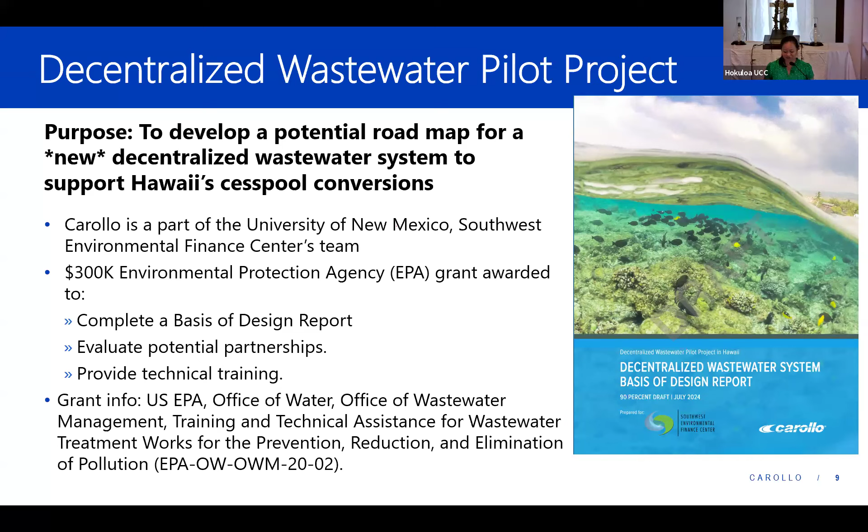There will also be recommendations for decentralized systems, such as we'll talk about today for Puako, but there'll also be recommendations for areas that need to be converted by individual wastewater systems, so at a household level. And then you've also heard and seen the South Kohala Community Development Plan that included Puako. So there are other community development plans for other regions within the county.

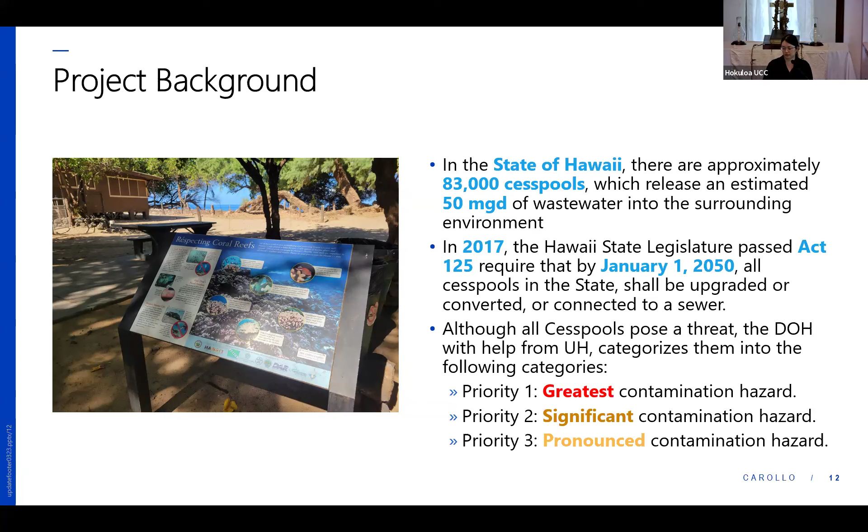The good news is there are many options to replace cesspools. Generally, there are 3. The first one I'll talk about is connecting to a centralized treatment plant. So these are your large treatment facilities that receive wastewater from towns or cities. The example shown here, the red lines, those are the sewer system in Kona served by the Kealakehe treatment plant.

A second option that might make more sense if you're looking at maybe a neighborhood or a group of homes or a commercial area like a school, hospital, or shopping mall, those could connect instead to a decentralized or cluster system or a package plant. So these are like a smaller version of your centralized plant.

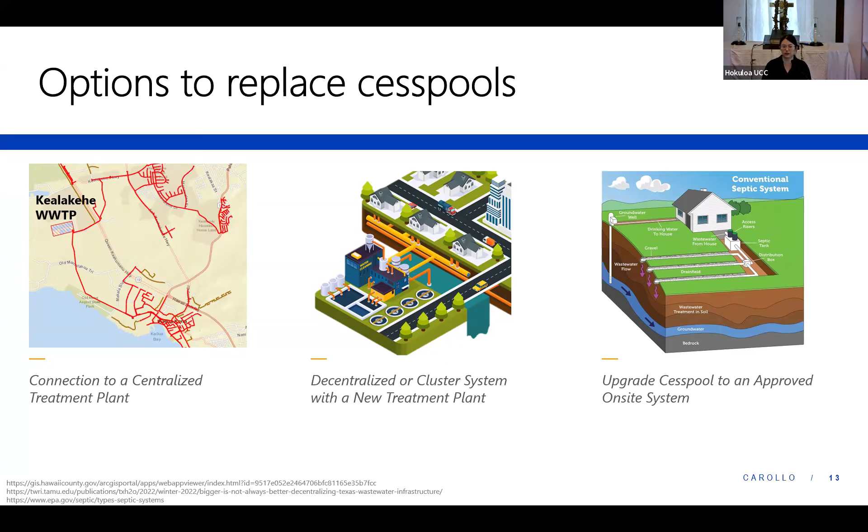Now, if you look at more rural areas, or if they're really far from a place with sewers, or it's just not really possible to put sewers in there, maybe due to the geography or topography, then your home might instead have an individual wastewater system. So these are your septic tanks, your aerobic treatment units, and leach fields.

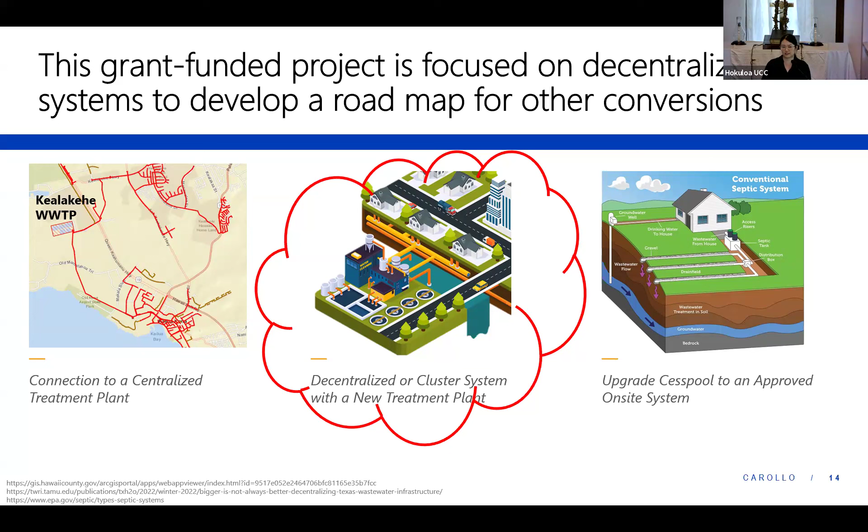For our grant-funded project, we focused on decentralized systems, and the goal is to provide a roadmap for other communities that have cesspools and are interested in connecting to a decentralized or package plant. We looked at different candidate sites, focusing on the Big Island, since the Big Island has the most cesspools compared to the other islands in Hawaii.

And great news for everyone, we selected Puako for this study, and it was for a number of reasons. All the cesspools in Puako are priority 1. And in Puako, you have the fuel break, which provides a great opportunity for water reuse using recycled water. And there have been studies done documenting the environmental impacts on the coral reefs.

And as we heard from Puako for Reefs, this community has been great in support for moving forward with a collaborative solution to improve the reefs. And there have also been many previous studies commissioned looking at different conversion efforts and ways to improve the coral reefs. So the next couple of slides are just going to zero in on a couple of these reasons.

First being the evidence of wastewater negative impacts on Puako's reefs. So studies have shown that the coral cover was reduced by 50% between 1970 and 2010. And in samples collected from the shore, Enterococcus indicated sewage pollution from the cesspools and the other wastewater units.

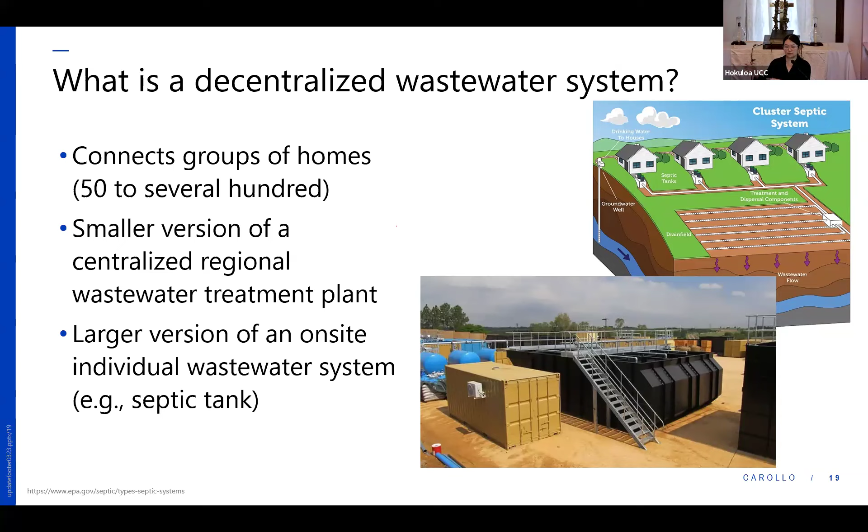So you see here in the graphics, these are just different ways you can organize these decentralized systems. They could be just small groups of homes with a shared leach field in this case. And then the bottom picture, that's an example of what a package unit might look like. They're modular, so you can sort of build them up to increase capacity of your plant.

Whether you have a centralized, decentralized system, or just your on-site system in your backyard, as George mentioned, all three of these will have three components: collection, treatment, and effluent management. So wastewater collection, that's just getting raw wastewater from your home or your business into a network of sewer pipes. And then the sewer pipes will bring that wastewater to a treatment facility.

That's where you have your primary treatment, biological treatment that cleans the water. In this example, that treated effluent goes into an outfall. But as we know, there have been better ideas now, more innovative ideas of reusing the water so that you can conserve your water supply.

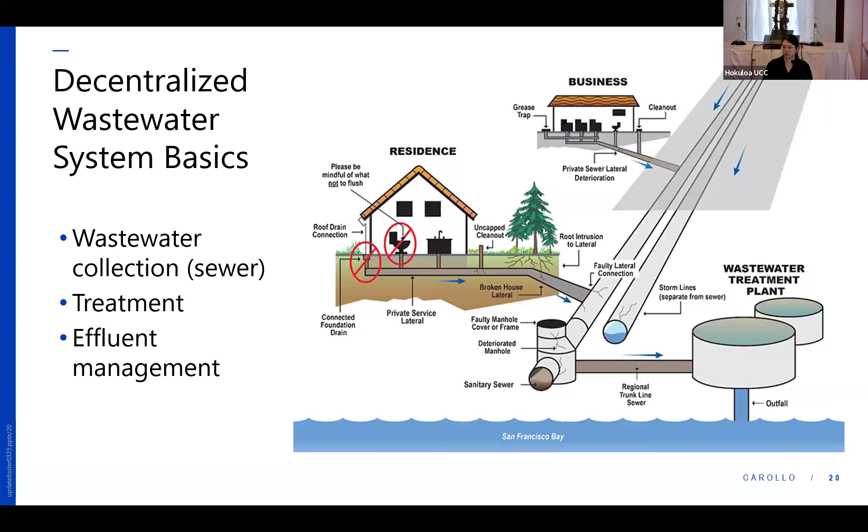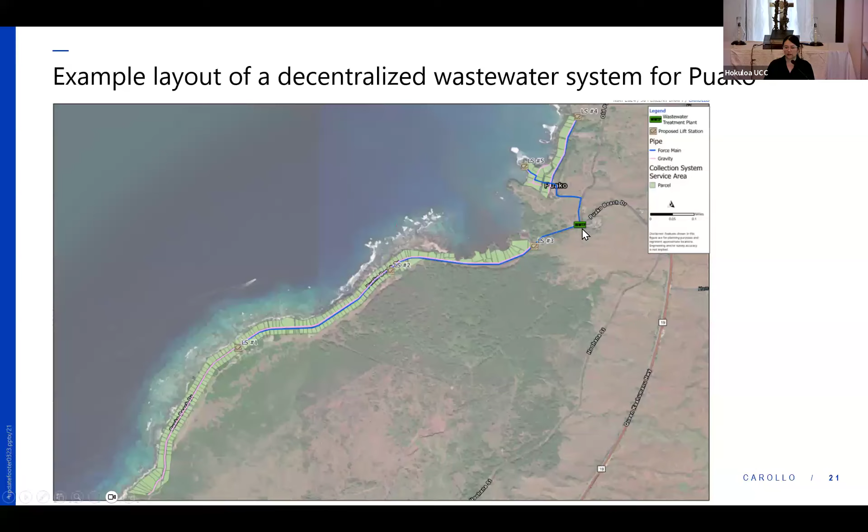Now, before going into all three, this is sort of an overview example layout of what we drew up for Puako. The green boxes, those are your TMKs or parcels. And then there's a blue or pink line running along the shore here in Puako and Wailea Bay. Those are your gravity mains or your force mains. And those will carry wastewater to the treatment plant that we just have a preliminary siting at the transfer station.

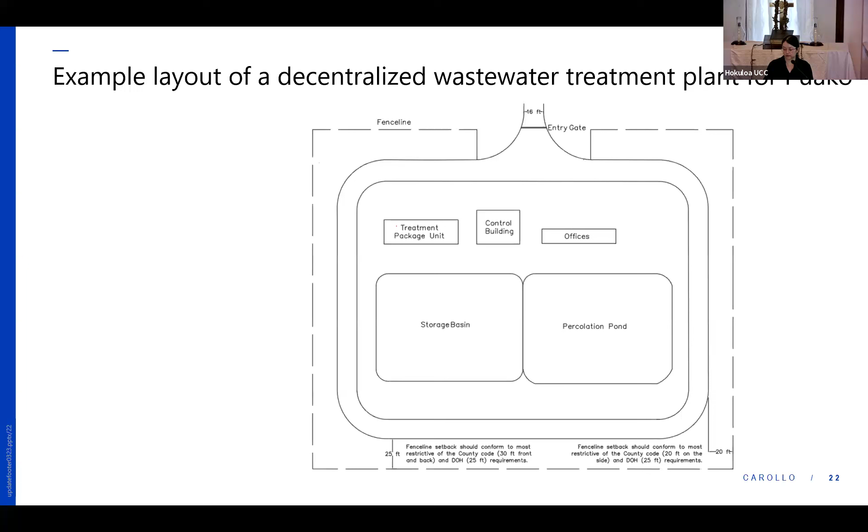The treated effluent in our report talks about it going into a storage basin. And from there, it would be discharged to the fuel break to be irrigated. And according to the Hawaii Administrative Rules, you need a 100% backup disposal system. So for this, we assumed a percolation pond.

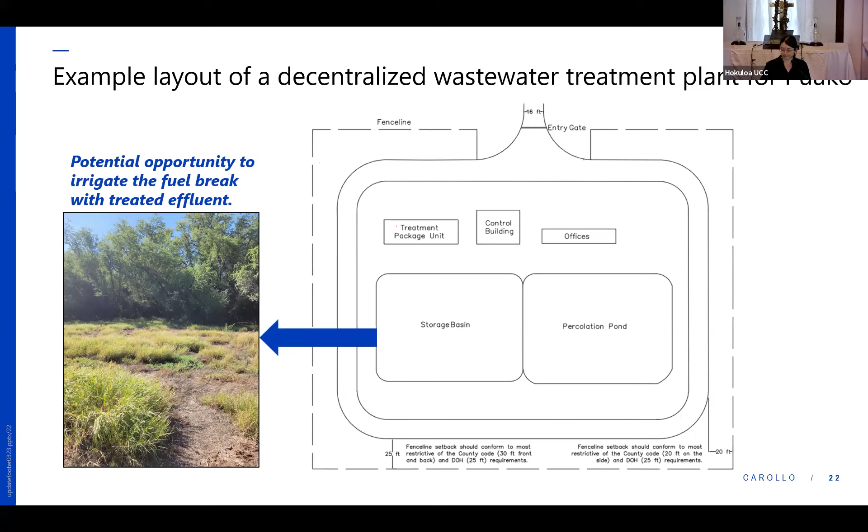Okay, now we'll dive more into each of those three components. So starting with the collection system, we assumed gravity sewers and pump stations. Gravity sewers, these are your most traditional, conventional methods used across the state. Operators, contractors, they're the most familiar with this type of system. And as the name indicates, they're basically just sloped pipes, carrying flow by gravity.

So ideally, maybe the road would be sloping towards the treatment plant, so the gravity sewer can pretty much follow the terrain of the land. But if you're in an area where it's more hilly, or in the case of Puako, where it's flatter, the gravity sewer is still going to slope down, but at a certain point, it's going to get too deep.

And that's where the pump station comes in, where it basically pumps or lifts up the water to a higher elevation. And then the process starts again with the gravity sewer, again sloping down. And this continues as you get to the treatment plant.

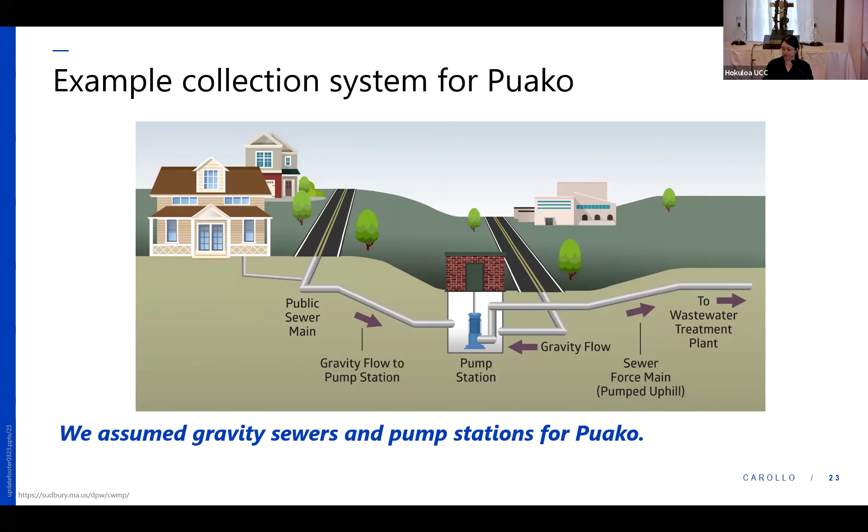For the treatment system, we assumed membrane bioreactors, or MBRs. In the industry, these are accepted as producing some of the highest quality effluent, because we want R1 water here. So Department of Health, they have their different categories of recycled water: R1, R2, and R3. R1 is the highest, and you couple the membrane bioreactors with an ultraviolet or UV system to disinfect the water. And that results in water that we could use within the R1 regulations.

In this diagram here, starting from the left, that's the treatment unit. The raw wastewater is brought to the treatment plant. It goes through a series of screens and tanks that provide biological treatment and filtration by the membranes. Then it continues on to the right side of the image. That's your ultraviolet system to disinfect the water.

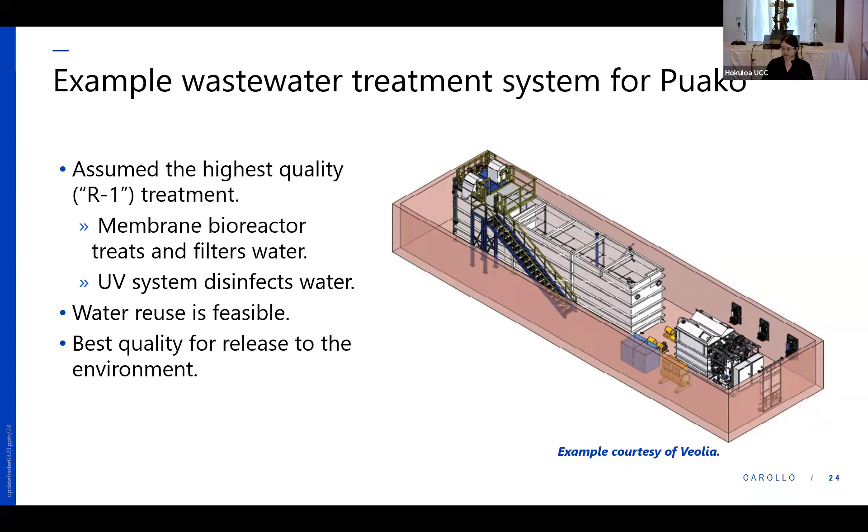Following this, the effluent water now goes into a storage basin. It can be a concrete basin. And from there, it can be discharged to irrigate the fuel break. And as I mentioned earlier, you need a 100% backup system, and that could be a percolation pond.

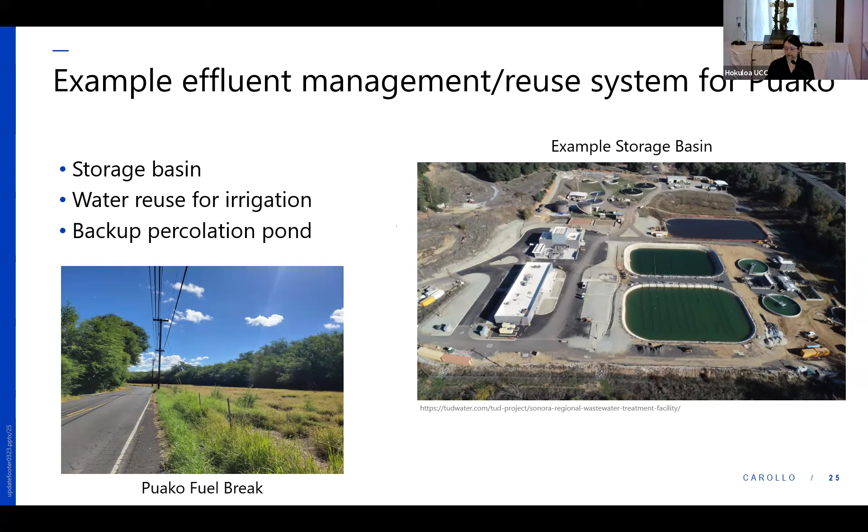Putting this all together, just showing you this image again now, you can see the collection, treatment, and effluent management systems in this map. And we believe with community collaboration for a decentralized treatment system, that should help to improve water quality.

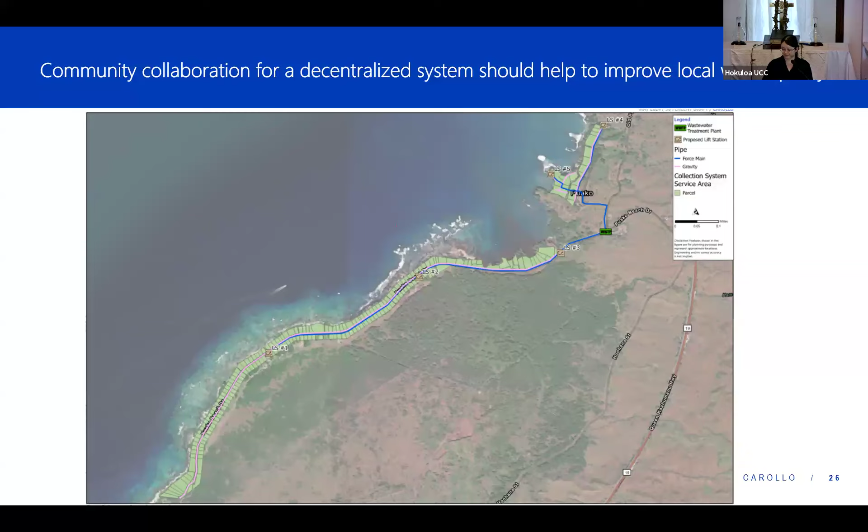Now I'll pass it back to Carrie. All right, thanks, Adrian. I have the fun job, the not so fun job, of talking about the cost.

So again, please look at this as just another piece of information. We're not saying this is the solution for Puako. This is a number, okay? So this is a planning level cost estimate. At this level, the expected accuracy is -50% to +100%.

So you can see the total cost of 133.4 million, which is largely driven by the collection system cost at roughly 112 million. And that's because the gravity sewer system is very expensive to build. It's a conventional way to build, and you guys have lived through this water main replacement. You've seen what it takes to cut up a road and dig and lay pipe. It's a very expensive effort. So that really drives this cost up as an option.

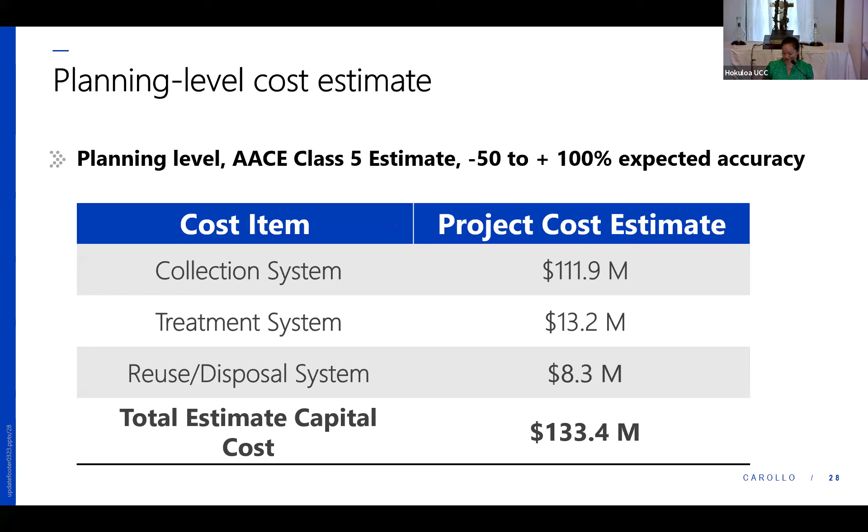So think of this collection system cost as the highest possible cost. It's obviously not ideal. So other innovative solutions for a collection system may need to be entertained. The other costs shown, the treatment and reuse or disposal systems, are also included, and those add up to roughly 21.5 million.

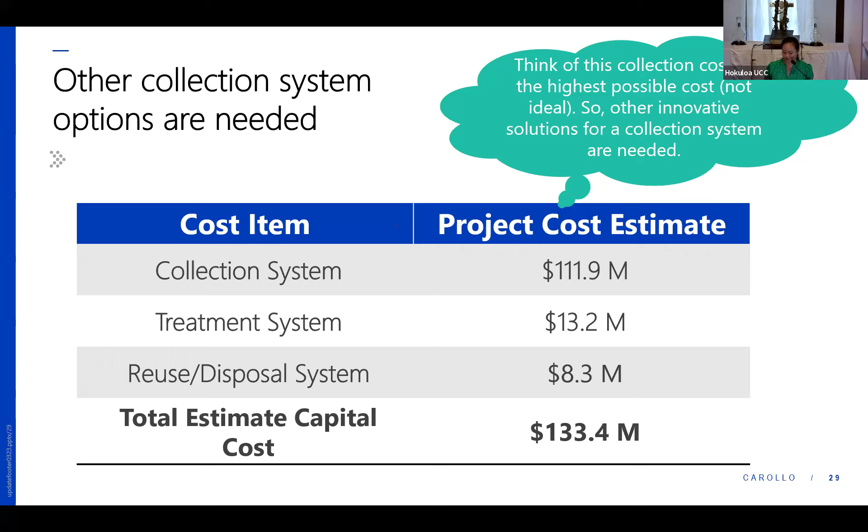Okay, so how do we address this affordability issue? Because clearly this is an issue. And I will say this affordability issue is definitely not unique to Puako. This is going to be a problem all over the state with these cesspool conversions. And the challenging thing about this issue is it's just a really expensive way to fix a problem, right? Normally you have the infrastructure in place and then you have the homes, but we're doing it a little backwards here.

So how do we address this affordability issue? One thing to do is to investigate alternative collection system or project options, which you are doing by meeting with the Mauna Lani, by talking to these other vendors for other technologies. So that's great. Keep doing that.

You can also investigate funding opportunities, which you're also doing, different financing mechanisms and ownership models. So we'll talk a little bit more about some of the information that we presented in the basis of design report on funding opportunities, financing mechanisms, and ownership models next.

So on a program plan, there is a lot of good information. This example is from the drinking water side, but there's some guidance on technical, managerial, and financial capacity. So to own and operate an infrastructure system, there's a lot of information. This is a whole industry, right?

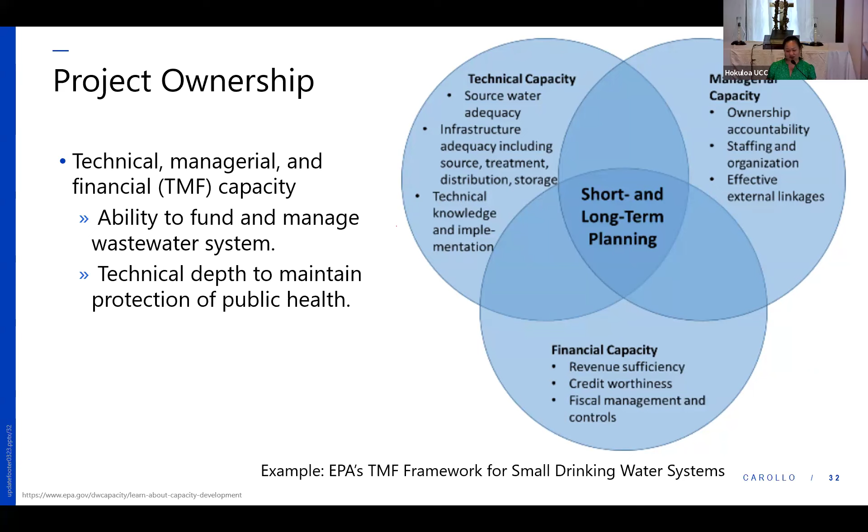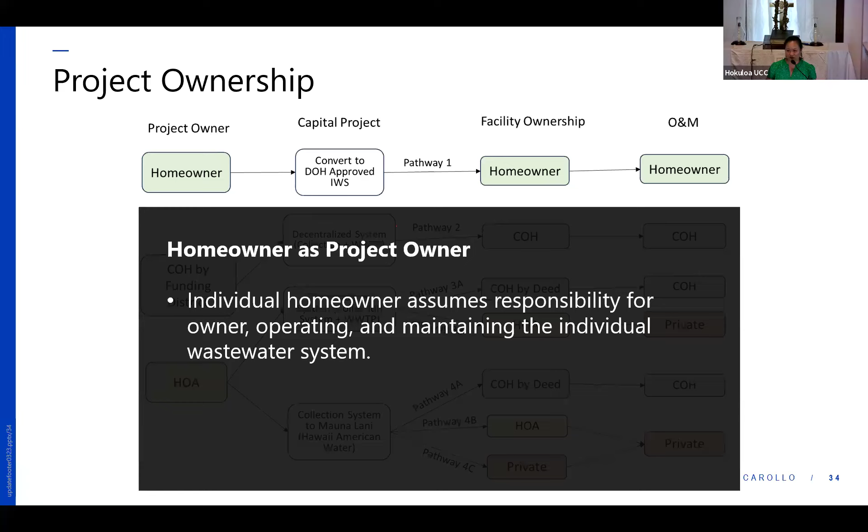Okay, so this diagram shows some different project ownership models, and we'll walk through each line. Not going to spend too much time on this first line. This is really just converting a cesspool to an individual wastewater system. It's largely on the homeowner to go that route. I'll mention this diagram is also included in the basis of design report, and it is walked through in the text as well.

So this next option is showing an example of the County of Hawaii as the project owner. Oh, let me orient you to this figure. So this first column is the project owner. The next column is the capital project in question, then the potential facility owner, and then the operations and maintenance, who would operate and maintain that facility.

So in this example, the County of Hawaii could be the project owner, and there are things called funding districts, and there's two different types. You may have heard of them. There's a community facilities district or a sewer system improvement district. And with this model, the property owners within that district can pay a tax or sewer service fee, and that will help to finance the sewer system costs.

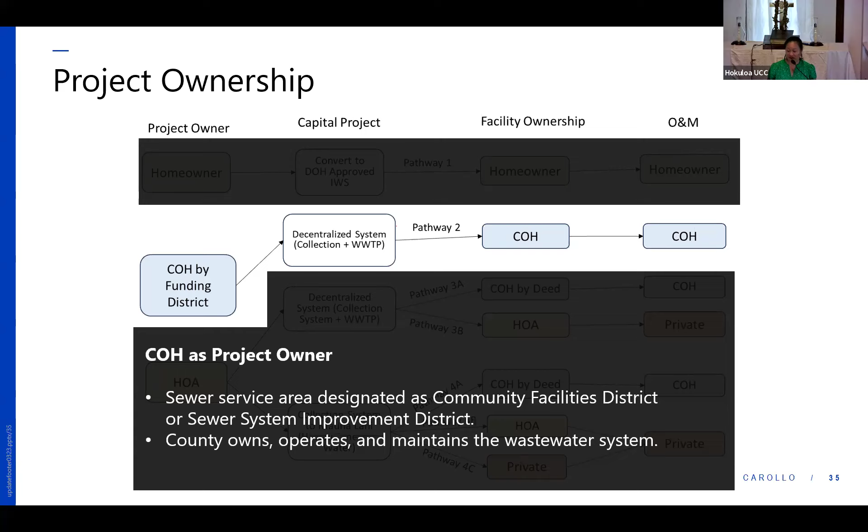So the difference between the community facilities district and the sewer system improvement district is that the community facilities district allows for private ownership if the county council determines there is a public benefit. And then for both of these models, it is possible that the county can issue bonds in whole or in part by a special tax. We'll talk more about funding for this option in a little bit.

In this next line, it kind of splits up into two projects, and here's where we do talk a little bit about the model with the Mauna Lani versus a new decentralized system. So this upper path here is the new decentralized system within Puako that Adrian had walked through with this potential site for a new treatment plant. And then this bottom path is the option to connect to the Mauna Lani.

So in this example, Puako could form a homeowners association, which could act as the owner. And then ultimately that ownership could be deeded to the county, or it could remain with the homeowners association. In this lower example with connecting to the Mauna Lani, you could also privatize both ownership and operations and maintenance.

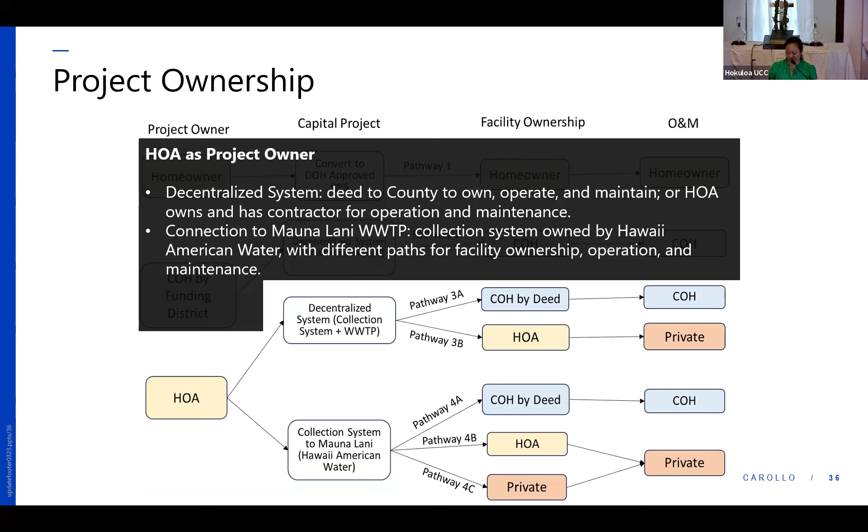Okay, I'm going to pivot now to some funding opportunities. And these are just a few examples that may have a higher eligibility for Puako. There's a lot more information in the appendix of the basis of design report on many more funding options. So I encourage you to take a peek at that.

But this first bullet here, US Congress community project funding and congressional direct spending, or earmarks. I believe you guys have already reached out to Senator Schatz and your US representatives. That's one way to go about it. So you request through Congress or the Senate. There's some deadlines associated with that. Water and wastewater projects typically have a 20% match requirement, and that can include state and private funds. One of the constraints is that you would need to comply with federal crosscutters, or just kind of more requirements of the project.

This next one, Water Infrastructure Finance and Innovation Act, or WIFIA, that is through the US EPA, Environmental Protection Agency. That's a low interest fixed rate loan that can account for 49% of the project costs. So the other 51% would need to be funded by other means. There are some hefty application fees that can range on average from 200 to 300,000 just to apply for that. And similar to the earmarks, there are federal crosscutters.

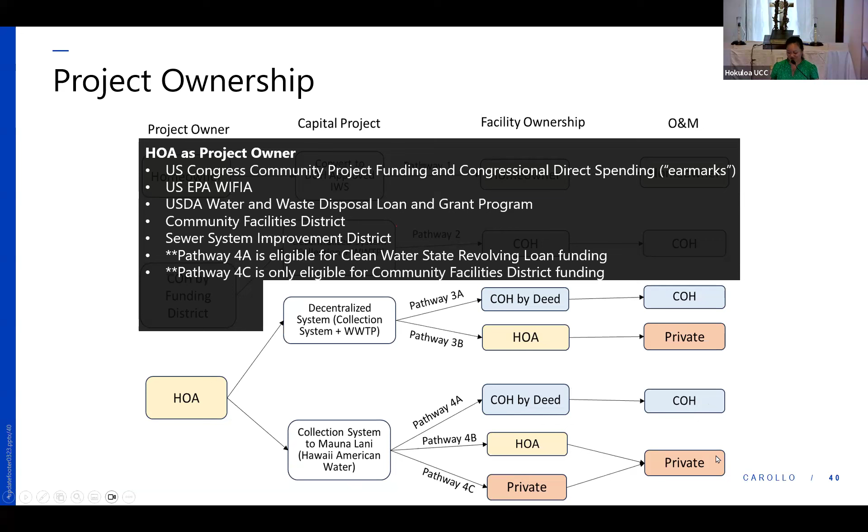Okay, so that was the funding portion. This is just an example schedule that we had included in the basis of design report, just to help the community think about how long this could take. So this is based on a sewer improvement district, based on that pathway, and assuming a design bid build, which is a pretty conventional way of implementing projects here. So just with each step, assuming there's about 4 years to form that improvement district, just about 2 to 3 years to manage the funding and figure that out. Just over 2 years to do the environmental permitting. And then really the longest timelines here are designing, constructing, and starting up the collection system and the treatment plant.

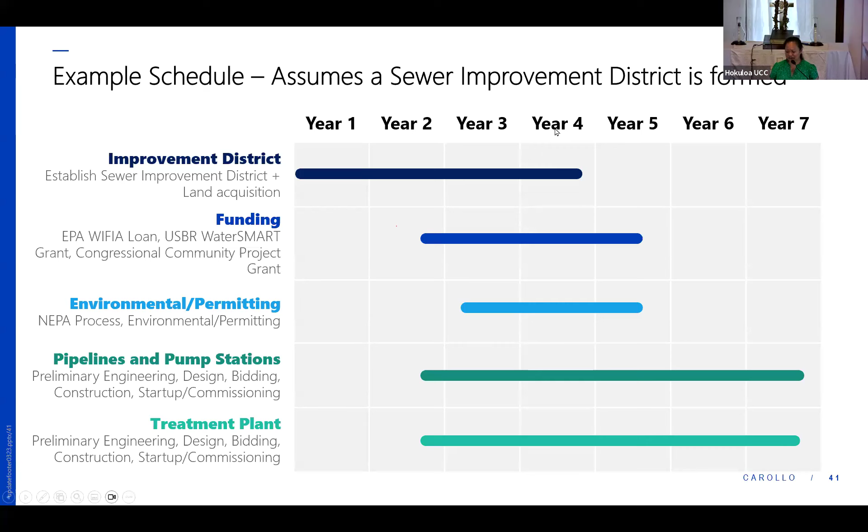So again, this is an example schedule. This is for a new decentralized system. There's ways to decrease this schedule. We did include some different project delivery methods in the basis of design report. So there's things called design build, where the designer and the contractor are on the same team and they work together, and they can work a little bit faster than a design bid build approach. There's also a model that's called design build operate maintain, or DBOM. So that's the designer, the contractor, and the long-term operations and maintenance all on the same team, all on the same contract. And there are examples for both design build and DBOM within the state. So those are ways to potentially decrease the schedule.

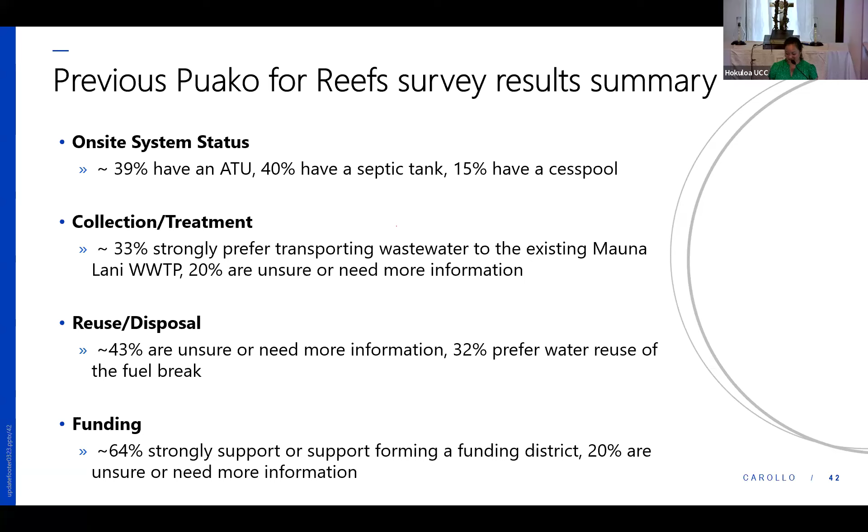We did also want to circle back and summarize the community survey that was conducted earlier this year by Puako for Reefs. So we had roughly 90 survey respondents, which is great. So just a quick summary of those 90 respondents, roughly 39% said they have an aerobic treatment unit or ATU. About 40% said they have a septic tank, and about 15% said they have a cesspool. Regarding the collection system type, roughly 33% strongly preferred transporting the wastewater to the existing Mauna Lani wastewater treatment plant, and 20% were unsure or needed more information. When it came to effluent management or reuse, about 43% needed more information before they could decide, whereas 32% preferred water reuse of the fuel break. When it came to funding, 64% strongly support forming a funding district, and 20% were unsure or needed more information.

So just kind of to sum it up, and not just the survey findings, but also some potential next steps based on what we just talked through. It seems like more information needs to be provided to community members to help with selecting the approach to the wastewater system. And specifically, additional information is needed on some of the collection system options, some of the treatment options, the reuse and disposal options, and then the process for forming a funding district.

That's all the presentation content we have. That was a lot of talking. We're happy to stop talking and take questions.

You mentioned the pilot project. Is that something we might wiggle our way into? So there's a couple aspects to that. So the question was that I had mentioned a pilot project, and can the Puako community get involved in that? So this whole basis of design report, it's really a pilot demonstration. So this basis of design report is to kind of demonstrate the process of, what does a new decentralized system look like for a community? What does it take to kind of get to this point? So that's kind of one aspect of the demonstration.